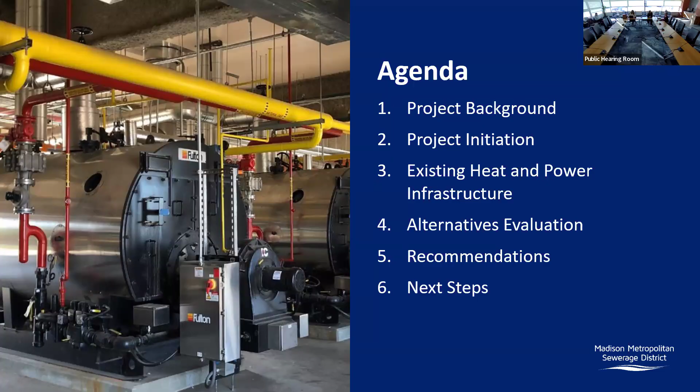In 2021, the district completed the 2020 Energy Management Master Plan. This plan focused on the energy sector and also the aging infrastructure that needs updates. In this plan, two key alternatives were identified for facilities planning: first, to upgrade the cogeneration engines with higher efficiency ones, and second, to convert biogas to renewable natural gas for pipeline injection.

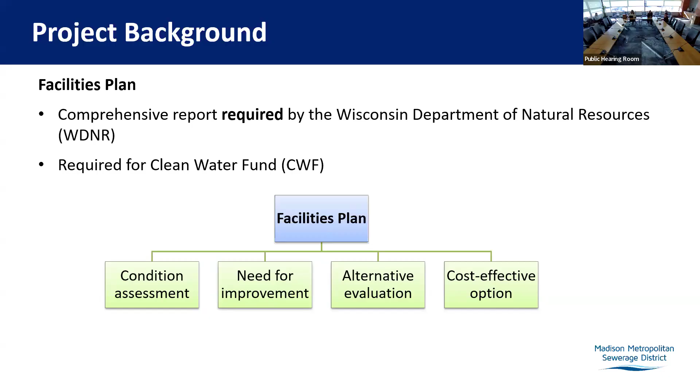So why the facilities planning? A facilities plan is a comprehensive report required by the Wisconsin Department of Natural Resources, especially for projects that intend to apply for the Clean Water Fund loan. The facilities plan reports on the condition assessment, needs for improvement, presents different alternatives and evaluates them, and also recommends the most cost-effective option.

In June 2024, Carollo Engineers was selected and awarded the contract to provide engineering professional services, with Strand Associates as a subconsultant.

The project workflow for this project can be divided into a couple of steps. The first thing was to decide on the decision-making criteria, which can be separated into categories: financial, operation and maintenance, implementation, and other. The list of decision-making criteria used were capital cost, life cycle cost, operational complexity difficulty, operational response risk and uptime, future site flexibility, market risk, energy recovery, and outside dependence.

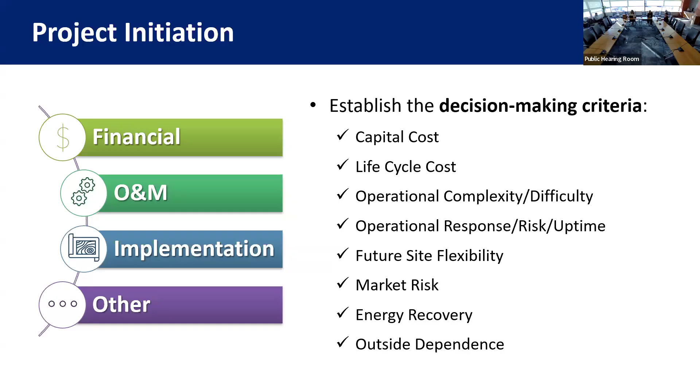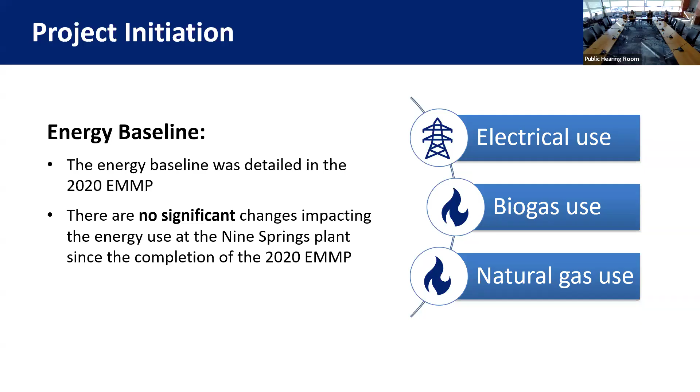The second step was to look at the energy baseline, which was detailed in the 2020 Energy Management Master Plan and looked at electrical use, biogas use, and natural gas use. This data was compared to the current consumption of the district, and it was identified that there are no significant changes impacting energy use at the Nine Springs wastewater treatment plant since the completion of the 2020 Energy Management Master Plan. The next step was to look at the biogas production and thermal demand projections for the project.

These two tables represent the summarized data. The first table, biogas production, shows the data in cubic feet per day of production. Looking at the column under the baseline, it's projected that production will increase through the year 2050. We also looked at other options, such as adding hauled waste and thermophilic digestion, and those two options would positively affect production, with a projected increase as well.

Under the thermal demand projections, we have similar data. Looking at the current total demand and the future total demand, we see that the projections are also intended to increase.

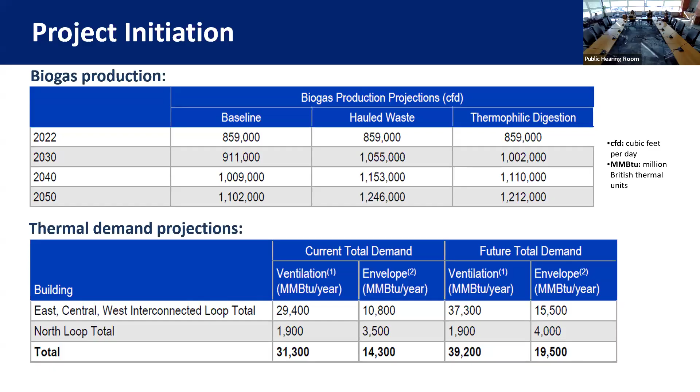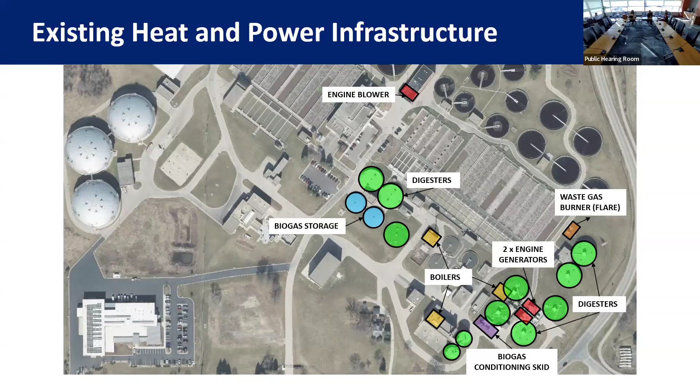The next step in the project workflow was to look at the existing infrastructure evaluation. This plan view of the plant infrastructure presents the biogas assets. Denoted with green are digesters where biogas is produced. Denoted with the blue circle is the biogas storage. Looking at the red squares is the engine blower and two engine generators. Those are the end-use equipment, together with the boilers, which are also end-use equipment.

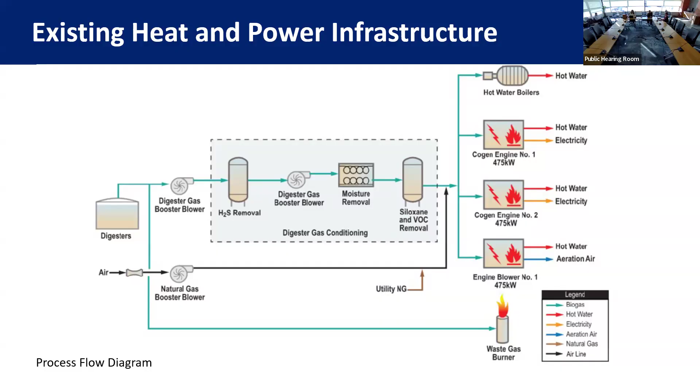So the current system at the district can be seen through the simplified process flow diagram. Starting from the left, biogas is produced in the digesters, goes through the digester gas treatment system to remove hydrogen sulfide, moisture, siloxane, and volatile organic compounds before being distributed to the two engine generators, engine blower, and hot water boilers. During the season of lower biogas consumption or increased production, biogas can be diverted to the waste gas burner.

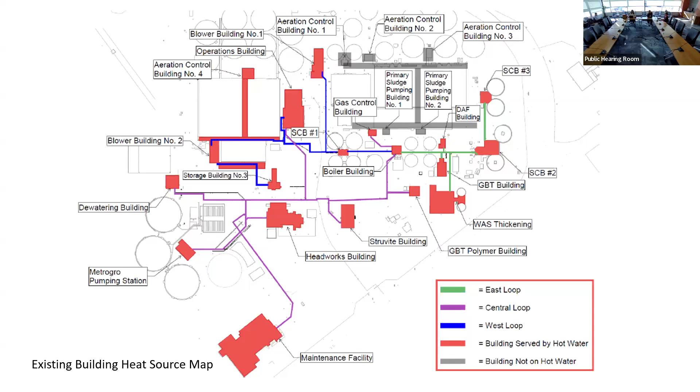Going further with the operational issues that were identified and documented, it's important to say that these issues make the system inefficient and difficult to operate.

Some examples: there are pressure issues at the gas conditioning skid. The hot water pipes are undersized, with no capability of distributing water throughout the site. The engine generators and engine blower are at the end of their expected life, and the radiators of the engines are undersized with decreased cooling capacity.

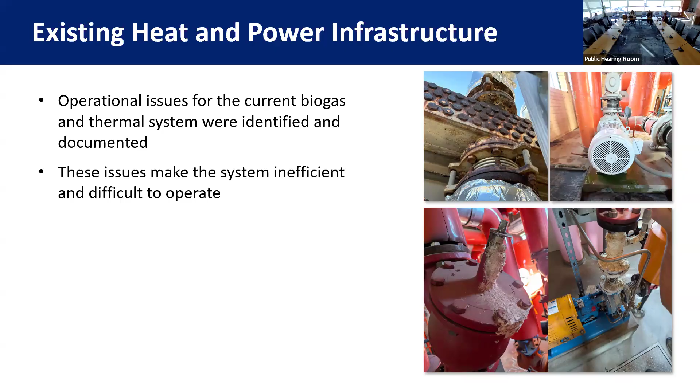The next step in the project was to evaluate different alternatives to improve the system. We looked at 3 main alternatives: the null pathway, meaning to maintain existing operations with no major changes; pathway 1, keeping the same system but upgrading the cogeneration engines with new ones; and pathway 2, completely switching to a different system and upgrading the biogas system to produce renewable natural gas for pipeline injection. We also looked at whether the heating system would be better centralized compared to decentralized.

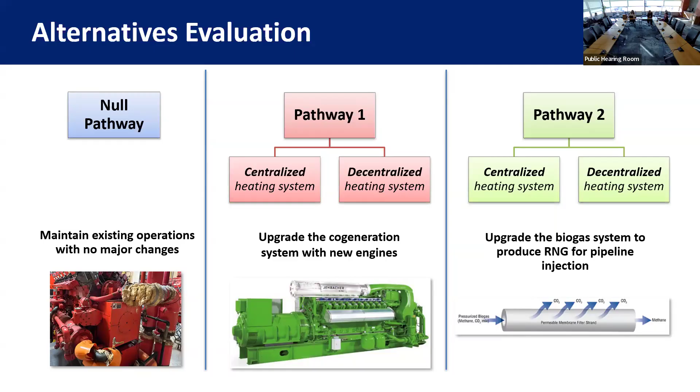For pathway 1, cogeneration, this is a simplified process flow diagram, very similar to what the district has now. Biogas is produced in the digester and goes through the digester gas treatment system. Under pathway 1, this would be completely new equipment before distribution to the end-use equipment. The main difference is that the engine blower would be decommissioned, and 2 engine generators would be replaced with new ones that have higher efficiency and higher output.

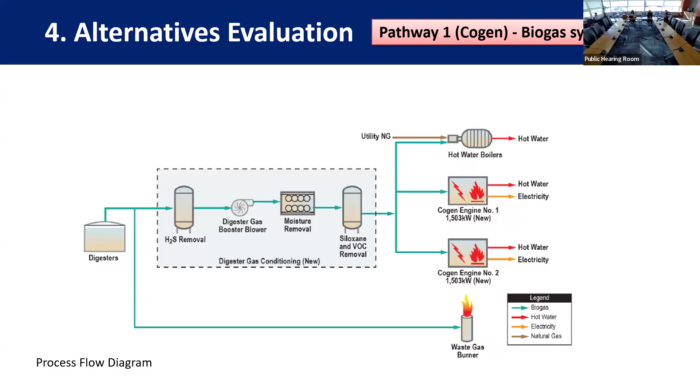Hot water boilers would also be served by biogas. The excess produced biogas could be rerouted to the waste gas burner.

Looking at the plan view of the plant, we can see the new location of the new buildings and facilities. The cogeneration building and the new gas treatment system would be located next to the Struvite harvesting building, denoted with the red square. For reference, the green circles represent the digesters where biogas is produced.

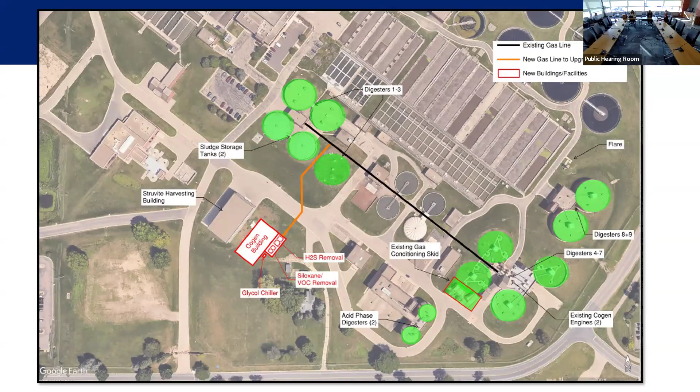This is a representation of the centralized building heat source map, very similar to what we have now. The difference is that buildings denoted with yellow colors, the buildings and tunnels, are proposed to be added to the hot water loops. The east, central, and west loop buildings, denoted in red, are currently served by hot water.

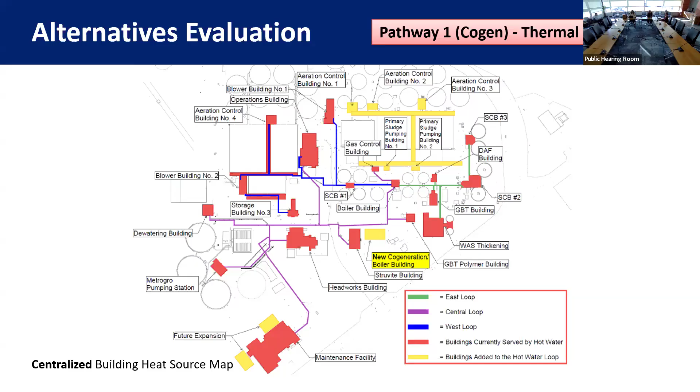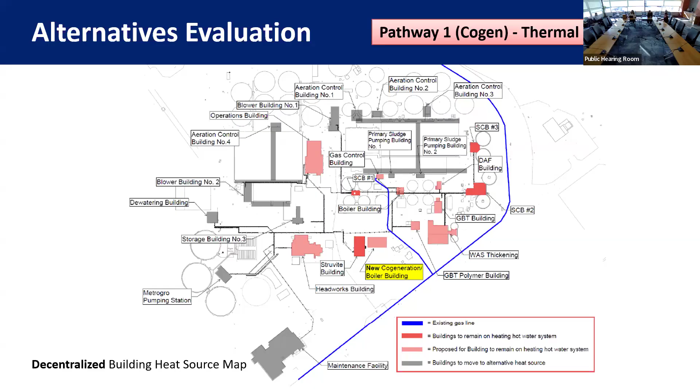This is the proposition for the decentralized building heat source map. Buildings denoted with dark red color are buildings to remain on the heating hot water system. Buildings denoted with light red color are proposed to remain on the heating hot water system. Buildings denoted with gray colors are buildings that would move to an alternate heating source.

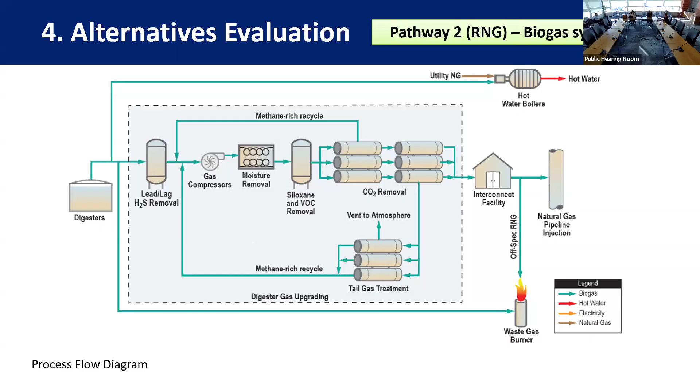Treated gas would then be routed through the interconnect facility, used for decompressing gas and checking quality before being injected into the natural gas pipeline. There will also be an option to reroute RNG that doesn't meet specification to the waste gas burner, and an option to use initially produced biogas in the hot water boilers, although this would not be the primary use. It's intended that all of the biogas goes through the treatment system for pipeline injection.

This is a simplified example plan view showing the new location of facilities and buildings. Similar to pathway 1, the interconnect facility and the RNG building are intended to be located next to the Struvite harvesting building. The plan for injecting treated gas is on the northwest side of the plant into the proposed natural gas line, the MG&E natural gas line, denoted with the cyan or light blue color.

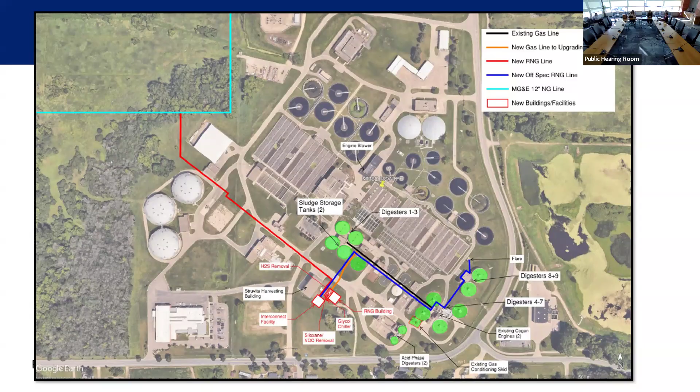Looking at the building heat source map, the centralized and decentralized options are exactly the same as in Pathway 1, but it's important to emphasize that Pathway 2, the renewable natural gas option, does not recover any heat because there are no cogeneration engines burning biogas, and that would be supplemented with an alternate heating source.

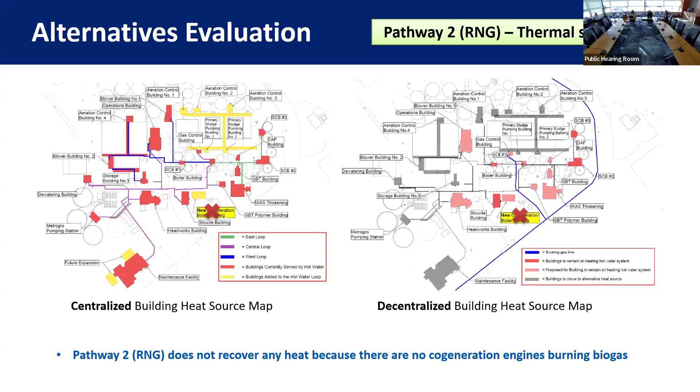This table represents the cost for all of the alternatives. Looking at the capital cost estimate presented in 2028 dollars, we can see the cost ranges for the null pathway a little over $4 million, with the highest cost for the Pathway 1 centralized alternative at a little over $51 million.

The annual operation and maintenance cost values are shown in parentheses, meaning these values represent revenues. Where does the revenue come from? It comes from the offset and savings from not having to purchase electricity, because electricity is generated at the plant. If we look at Pathway 1 for both centralized and decentralized, this value, compared to no pathway, increases to a little over $2 million.

This is due to having new higher efficiency engines with higher output. For Pathway 2, both centralized and decentralized alternatives, the values increase a little over $4 million, and this revenue comes from the sale of the RNG and also from the sale of the environmental attributes attached to it.

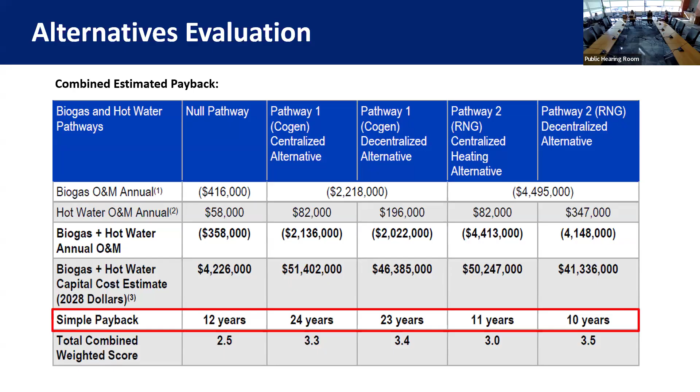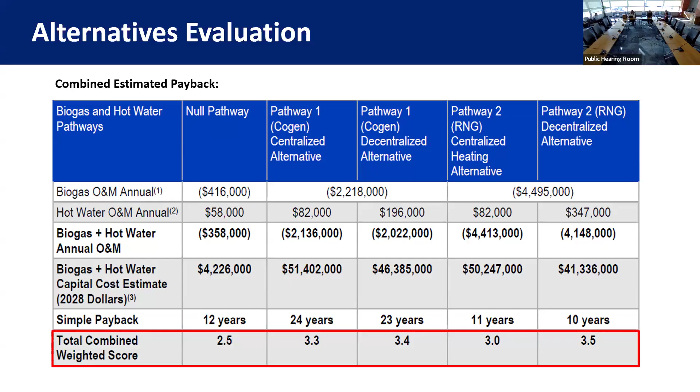Looking at the payback time, it ranges from 10 years at the lowest to 24 years at the highest, with the lowest being for the Pathway 2 RNG decentralized alternative. We also have the total combined weighted score based on the decision-making criteria, and we can see that the highest score of 3.5 is for the Pathway 2 RNG decentralized alternative.

So how do we get revenue from Pathway 2 RNG? Well, it's tied to the Renewable Fuel Standard Program, initiated through the Energy Policy Act in 2005. It's managed by the EPA and used to offset carbon emissions in the transportation sector. This program obligates fossil fuel refiners and importers to purchase a certain amount of renewable attributes, and producers of renewable fuels, including RNG, produce these attributes called renewable identification numbers, or RINs.

In this case, under this pathway, the district would be the producer. Renewable fuel types are divided into 4 categories, where biogas produced at wastewater treatment plants falls under cellulosic biofuel D3, and the average value for a D3 RIN from 2015 through January 2025 was $2.20 per RIN.

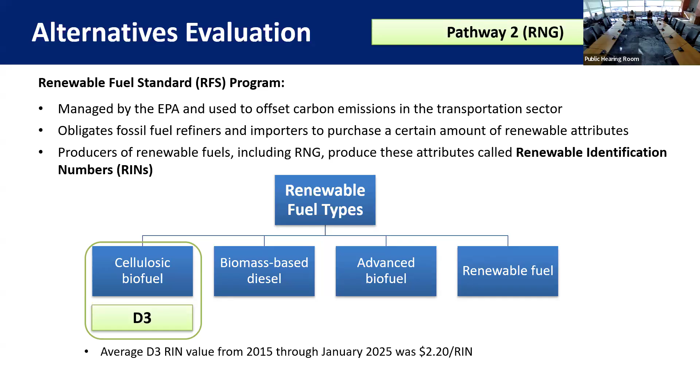The last step in the project workflow was to provide a recommendation. Although the null pathway represents the lowest capital cost, it is not recommended due to significant maintenance requirements, increased operational risk, and limited capacity, and it is unsuitable for long-term planning due to equipment age.

Pathway 2, RNG decentralized, is recommended as the preferred pathway due to lower capital costs, significant revenue potential associated with RNG environmental attributes or RINs, expected reduction in maintenance time by using natural gas for on-site equipment, and the highest combined score of the decision-making criteria.

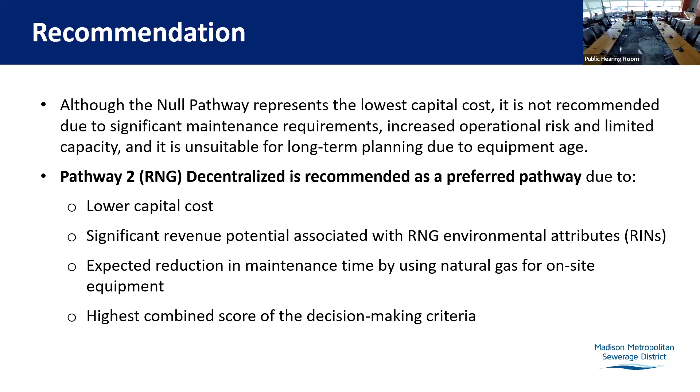The next steps for the project are that this public hearing is required before submitting the facilities plan to the Wisconsin Department of Natural Resources for approval. Once we receive the letter of approval, district staff will request formal acceptance of the Heat and Power Improvements Facilities Plan from the Commission.

Prior to initiating the design phase, the district will revisit the recommended approach in the future to confirm that the underlying economic evaluation and assumptions made remain valid before proceeding with implementation of the facilities plan. Thank you.